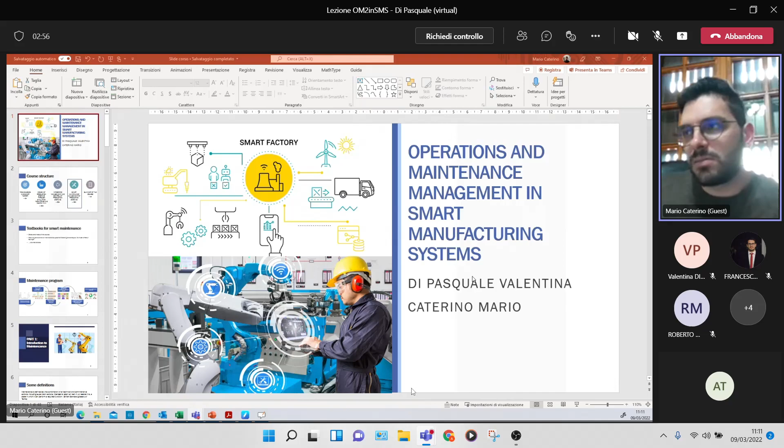Perfect. So, as Valentina said, I am Mario Caterino, a mechanical engineer, originally from the University of Campania Luigi Vanvitelli. I am here to introduce the course that will be led by Valentina and me in operations and maintenance management in smart manufacturing systems. Sorry, let me share the screen in full. Can you see the full screen now? Yes. Perfect. So, as Professor Di Pasquale said, I will lead the part related to smart maintenance management

of production systems. So, we will focus only on maintenance, and in particular on the latest maintenance topics achieved in recent years, because Industry 4.0 technologies are changing the world, and maintenance, an important part of all industrial plants, is still adapting to these new technologies and concepts. So we will start from the base of maintenance, introducing some definitions, some reliability theory, and then we will arrive at the latest innovative maintenance systems developed in industrial plants.

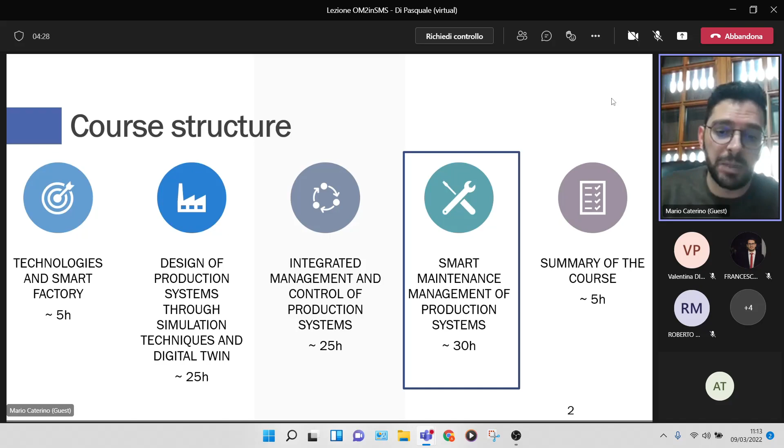Now, I think Professor Di Pasquale already told you that this is a first-year course. So we don't have very specific books that I can give you. I suggest you carefully follow the lectures and take notes on the slides and on what I will say. I can suggest this book, from which I will take some parts, and every time I take references from a journal, I will put them into the slides so you can directly have the references.

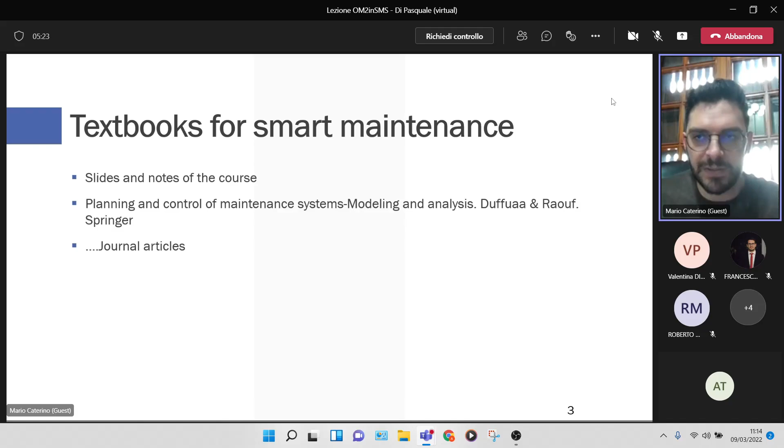Now, the program of the course is the following. Today we will recall some fundamental maintenance concepts, hopefully today and maybe also next week. We will give some definitions about maintenance. Then we will introduce three fault analysis techniques, such as the FMEA, failure modes and effects analysis, useful to provide qualitative information about the failure modes of machines, and the FMECA, which also considers a criticality analysis and gives quantitative information about failure modes. We will also see the fault tree analysis, another technique for failure analysis.

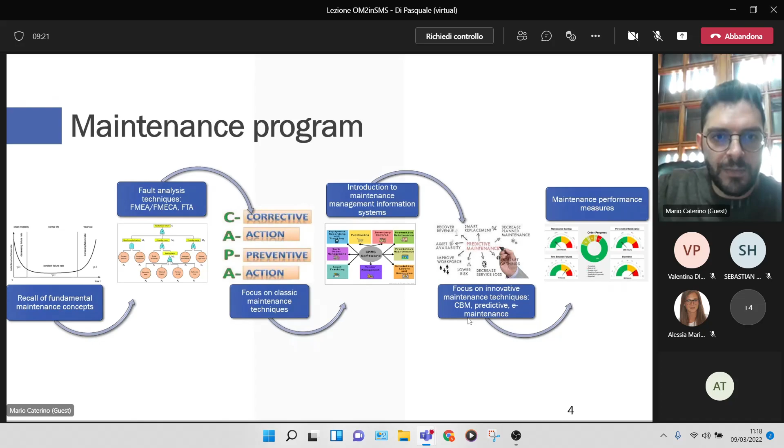In the last part we will also see some maintenance performance measures, and we will have some exercises during the whole course. Sometimes I will use my brand new electronic board, also today. I would like you to participate in these lectures. We are very few people, so sometimes I will ask you some questions, very simple ones, so don't worry. As I was saying, we will have exercises during the whole course, which is 30 hours for my part. So we can start

introducing maintenance. According to the definition given by the British Standard Glossary of Terms, it can be defined as the combination of all technical and administrative actions, including supervision actions, intended to retain an item in, or restore it to, a state in which it can perform a required function. Note that each equipment, each machine, each item is designed to work under specified working conditions related to, for example, humidity, temperatures, loads, and so on.

So when we say that an equipment or a system has to fulfill its required function, we mean that it has to work in its standard condition of temperature, humidity, or loads that are given by the designers, by the companies who designed the system.

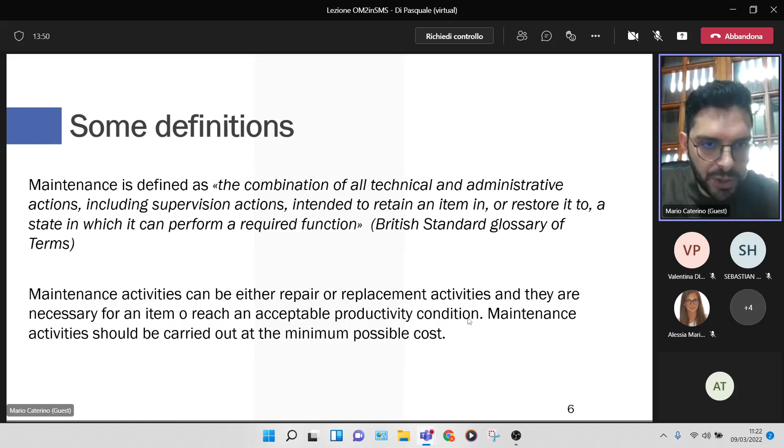And here we can introduce now the concept of fault, that represents the passage of an item from a state in which it is able to correctly perform its function to a state of damage or failure, in which the item is no longer able to correctly perform its function. It is not an on-off system, but there are also intermediate levels for each machine.

Which are the most common fault causes? We will refer in the future to fault and failures as synonyms. So if I say failure or damage or fault, you will understand that they are synonyms for me. The most common fault causes are, for example, stresses, impacts, fatigue. In fact, depending on the loading condition and material response, the structural characteristics of the components play a very important role. So, for example, a damage can occur if a component is subject to fatigue. I think you all should know what fatigue is.

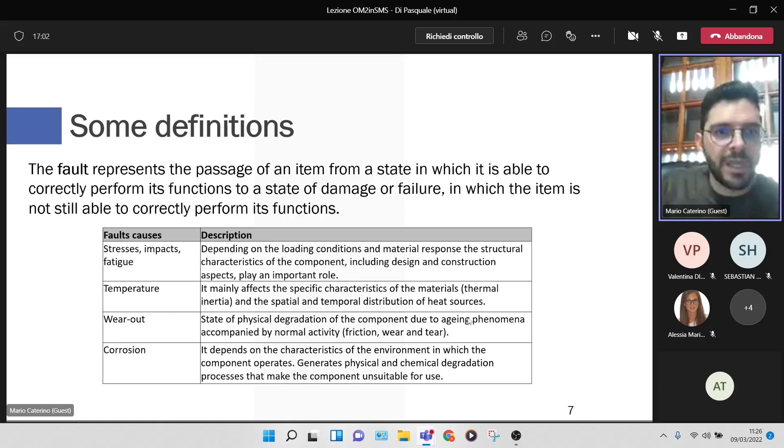Another important feature related to maintenance is the maintainability of a system or an item, which is defined as the measure of the ability of an item to be retained in or restored to a specific condition when maintenance is performed by personnel having specified skill levels and using prescribed procedures. So maintainability obviously depends on the product design, the technical level of the repair personnel, the repair process, the procedures, and so on.

So it is a characteristic not only depending on the component, on the system, but also on the skills of the personnel and on the procedures developed by the maintenance personnel. It is a very important factor because it allows us to understand how difficult it can be to maintain an item, to maintain a system.

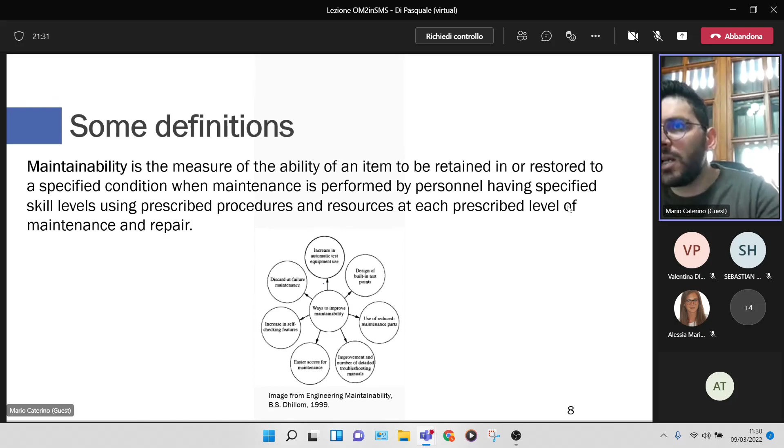Okay, now we can define different levels of maintenance, because as you can imagine, not all the maintenance operations lead to a similar status of the equipment after maintenance. We talk about perfect repair or perfect maintenance when a maintenance action restores the system's operating condition to as good as new.

What does this mean? Upon perfect maintenance, a system has the same lifetime distribution and failure rate function, we will define the failure rate function later, as a brand new system. For example, the complete overhaul of an engine with a broken connecting rod is an example of a perfect repair. Generally, when we replace an item or an equipment, we are performing a perfect maintenance, a perfect repair.

As opposed to the perfect repair, to perfect maintenance, there is the minimal repair or minimal maintenance. That is a maintenance action which restores the system to the failure rate it had when it failed. So in this case, the system is referred to as bad as old.

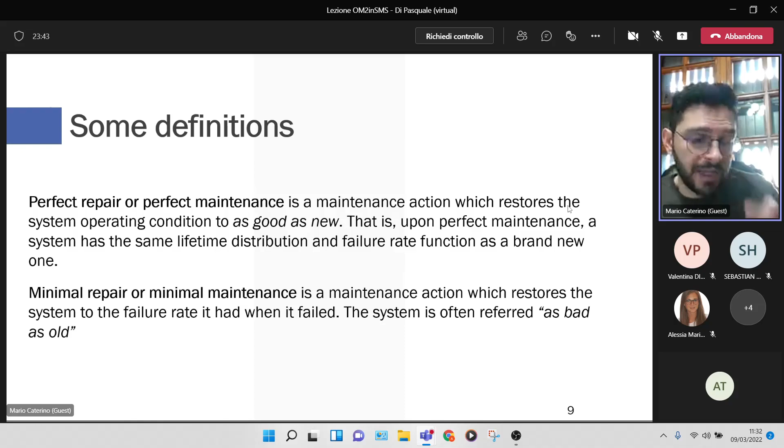For example, if you change the flat tires on your car, the failure rate of the car remains the same, because you are simply acting on a single part of the entire equipment, of the entire system that is the car. So its failure rate, the failure rate of the car, is unchanged.

We talk about imperfect repair or imperfect maintenance when we talk of a maintenance action that does not make a system as good as new, but younger. So we are in this case in an intermediate state between the perfect maintenance and the minimal repair, because I cannot achieve a perfect maintenance, but the system is better than after a minimal repair action.

In fact, imperfect repair restores the system operating status somewhere between as good as new and as bad as old. So clearly imperfect maintenance includes these two extreme cases, minimal and perfect repair. For example, engine tune-up is an example of imperfect maintenance because it restores the engine not in a state as good as new, but improves its performance with respect to before the maintenance actions.

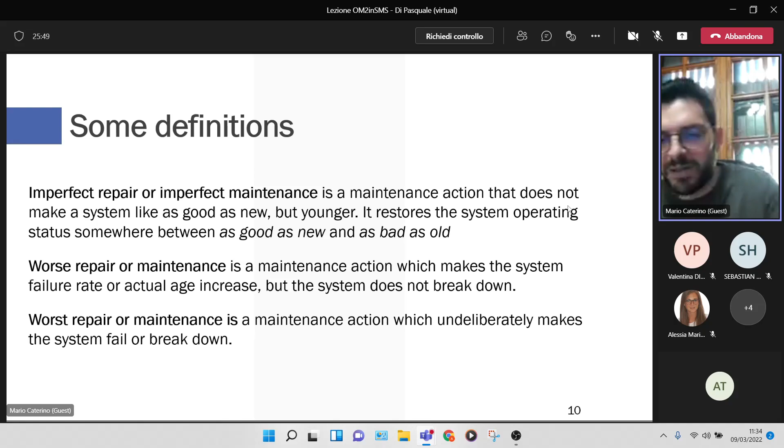What are the main causes of worse and worst repair? For example, repair of the wrong part. This is a common problem, for example, when a corrective maintenance policy is applied. In a few slides we will see what corrective maintenance is, but you can already understand that a corrective policy is when the company waits until the failure of the system or the equipment to replace the equipment.

The problem is that if you have some complex systems, you should identify the failed part. And in complex systems, you can arrive to have thousands of parts. So it is not very uncommon that in some cases a repairman, the personnel, can be wrong in deciding which is the part to repair. And in that case, if the personnel is wrong on that, they are performing a worse repair, worse maintenance.

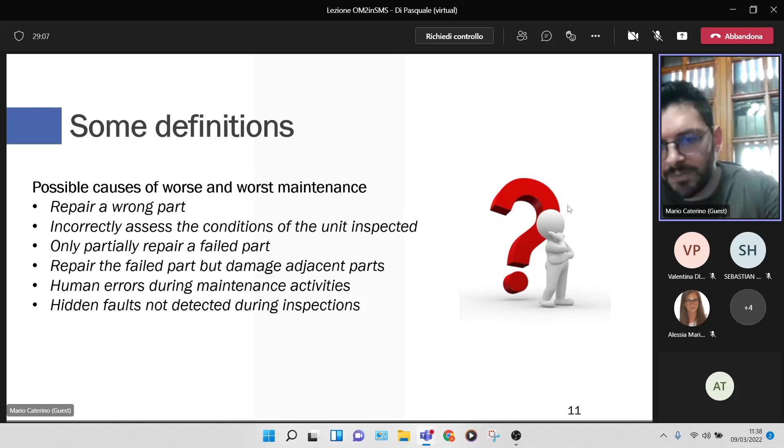Now, we talked about some definitions of maintenance, starting from its meaning, looking at maintainability, perfect maintenance, imperfect maintenance, but we still have not talked about which are the maintenance objectives, the maintenance goals. Obviously, performing correct maintenance activities leads to reducing the costs and increasing the revenues of a company. So the first reason to perform maintenance activities is for breakdown reduction.

What does breakdown reduction mean? Breakdown reduction means to reduce the time in which, for example, a machine is not working. This leads to maximizing production because, as you know, or as you should know, the overall equipment effectiveness of an industrial plant or also of a machine takes into account the availability of the machines. And obviously the availability of the machines is defined as the ratio between the time in which the machine is working and the total time available for production.

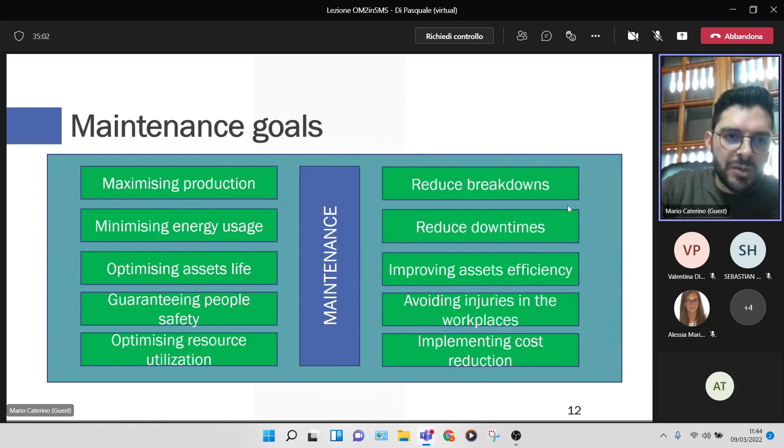Or for those of you who are mechanical, think about a foundry. If correct maintenance actions related to the furnace are not performed, the whole foundry environment can become very dangerous. So these are the main objectives for which maintenance actions are generally performed.

Now we can go towards the definition of the principal maintenance policies. But before that, we should define two types of maintenance, because each maintenance policy, each maintenance action can be categorized as ordinary or extraordinary maintenance. Ordinary maintenance concerns all the operations that must be done to guarantee the correct functions of an asset, and it is categorized as an exercise cost.

So when I perform an ordinary maintenance action, I have to pay for that action. It is an exercise cost for the industrial plant. In fact, the costs related to ordinary maintenance are expensed immediately and they are not capitalized. For example, substituting the flat tires of your car is an ordinary maintenance action.

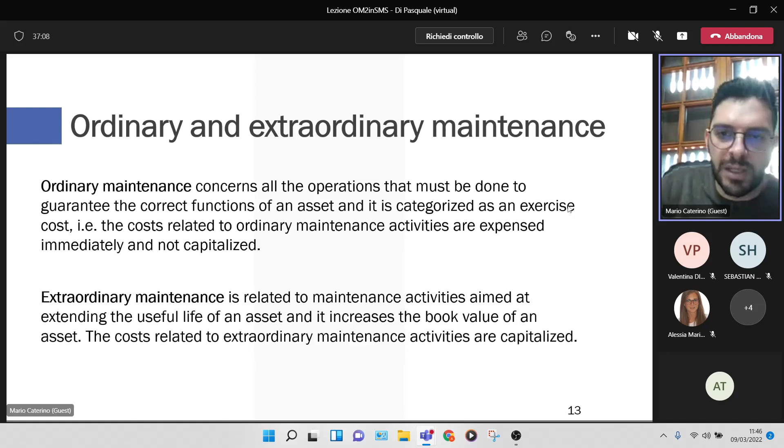Extraordinary maintenance actions instead are related to maintenance activities aimed at extending the useful life of an asset, so aimed at increasing the book value of an asset. And this type of maintenance activity has to be capitalized because it increases the value of the entire system. So each maintenance action can be classified within these two types of maintenance, ordinary or extraordinary maintenance.

As I said before, corrective maintenance is performed. It is also called failure-based maintenance, and it is performed when a system fails, when an equipment fails, when an item fails. So, according to these policies, companies wait for the failure, the damage of a system.

Note that corrective maintenance actions can be performed even if the system is still working. When I say something about damage, I mean something that can reduce, for example, the productivity of a system, reducing its potential. For example, it is not working at 100% potential, but it is working at 70% potential, as I said in the beginning of this lesson.

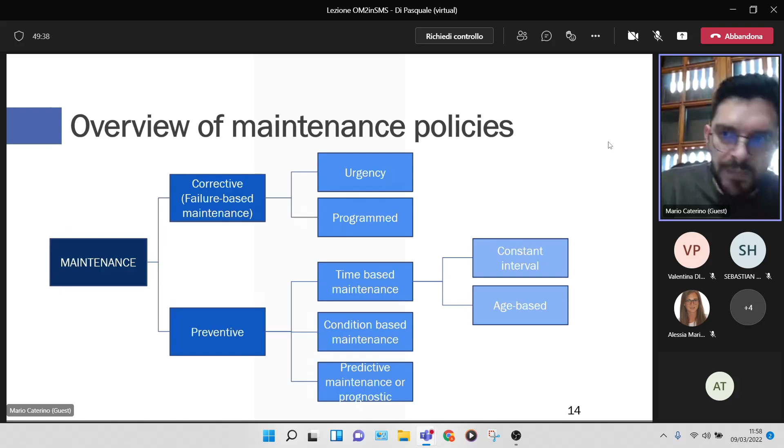Okay. Now, we should also define some important parameters related to maintenance. Let me do this slide, and then we can have a break of 10 minutes.

Okay, we need to define, first of all, the mean time between failures. What is the mean time between failures? As the name says, it represents the mean time between two consecutive failures on the same system or component, assuming that the system or component is repairable.

Be careful in the difference between the mean time between failures and the mean time to failure, because obviously mean time between failures is referred to repairable systems. The mean time to failure is referred to non-repairable systems. In fact, it represents the mean time of a non-repairable system to arrive to failure and to be replaced.

The mean time between failures, as you can understand, refers to something that has failed, but the policy, as we said, in which we wait until something fails is the corrective policy. So when we talk instead about, for example, a preventive maintenance policy, we should talk about mean time between maintenance. That represents the mean time between two consecutive maintenances on the same system or components.

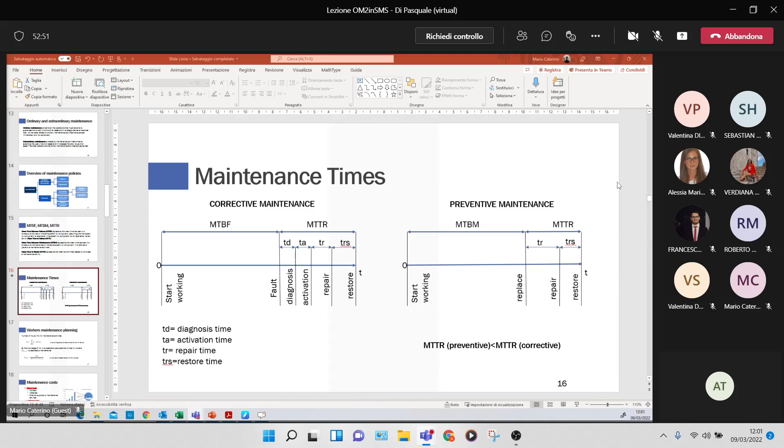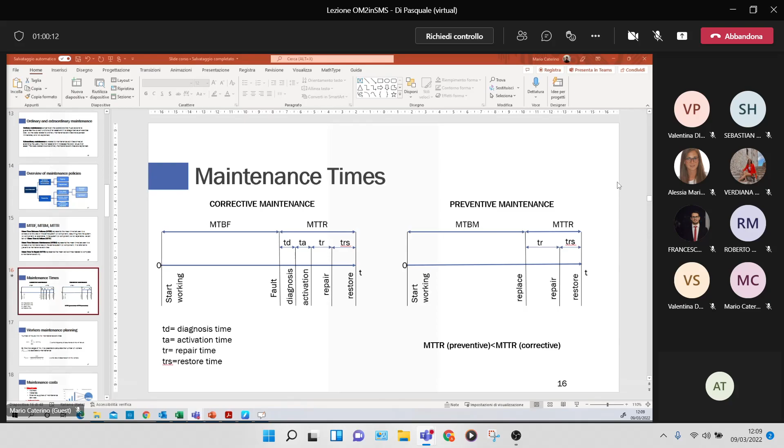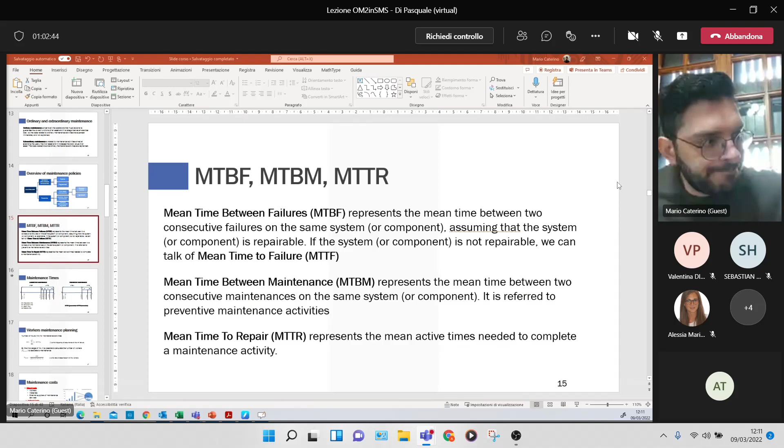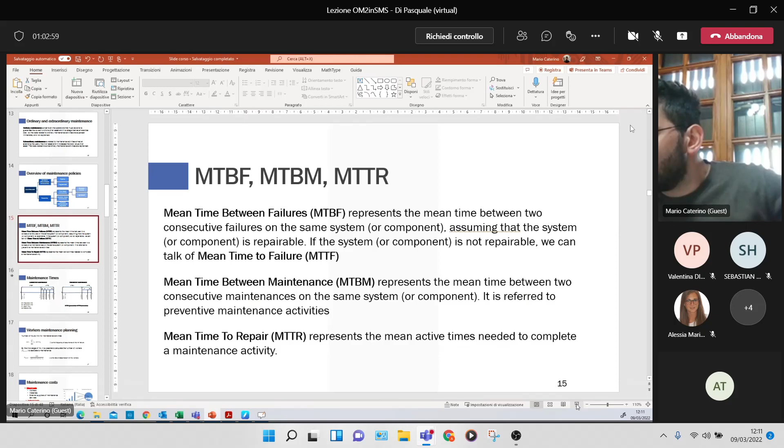Okay, before starting this new slide, I think we can have a 10 minutes break if you agree. Guys, is it okay? Yes, thank you. Yes, it is okay. See you in 10 minutes. Okay. Okay, guys, are you there? Can we restart? Yes. Perfect. Okay. I never ended sharing my screen. Okay. Can you see the full screen now? Yes. Perfect.

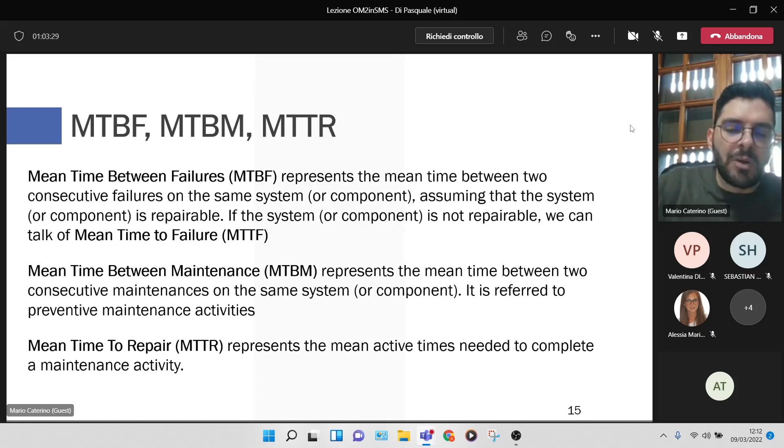Okay. So we were talking about the definition of some important parameters for maintenance, in particular the mean time between failures, the mean time between maintenances, the mean time to failure, and the mean time to repair. Now, according to these definitions, we can try to evaluate how the mean time to repair is composed, referring to a corrective maintenance policy and to a preventive maintenance policy.

So let's suppose, for example, that we have a component that starts to work at time 0, and it works for a time equal to the mean time between failures, the MTBF. When the failure occurs, a maintenance action has to be performed, and it requires the mean time to repair. Now we can say that when we are performing a corrective action, the mean time to repair is the sum of 4 values: the diagnosis time, the activation time, the repair time, and the restore time.

What are they? The diagnosis time is simply the time needed by the personnel to identify the part of the system that has failed. Often, as we were saying, we have very complex systems made of hundreds of parts. So it is not simple to evaluate which component has failed. This requires a diagnosis time, that is the time in which we are waiting for the diagnosis made by the skilled personnel that perform maintenance activities.

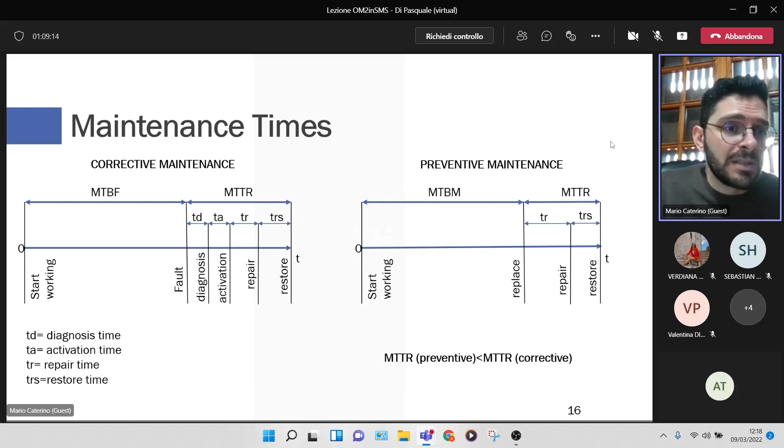Perfect, perfect. And yes, I think also the activation time. Why? Because if I know beforehand that I have to repair something, I prepare what I need to do it. Perfect, you are right. So in fact, if we look at what happens when we are performing preventive maintenance, you can see, as your colleagues said, that the diagnosis time and the activation time disappear.

The diagnosis time, because when we perform preventive maintenance, no components have failed. So there is no failure. I do not have to estimate which component has failed, obviously. But also the activation time disappears, because if I am going to perform a preventive action, I already know on which components I should act. And so I am already prepared for it. So also the activation time disappears. Good.

What can we conclude? Supposing that the repair time and the restore time are the same in the case of corrective maintenance and preventive maintenance, so for example, in preventive maintenance we suppose that repair or replacement times are the same as corrective maintenance, we can say that the mean time to repair for preventive maintenance is always less than the mean time to repair for corrective maintenance. Perfect.

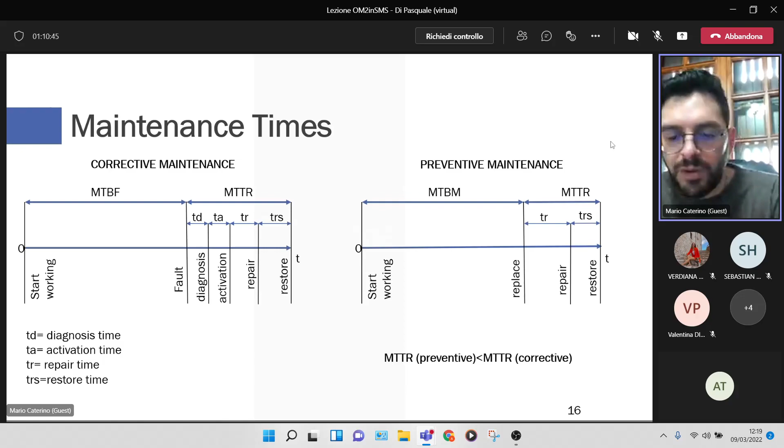Now, we can also estimate the number of hours to perform maintenance activities. To do this, we should know some very important parameters that are not very simple to obtain, because the number of hours for maintenance activities can be seen as the sum of the frequency of occurrence of the i-th failure, referred to the i-th component, multiplied by the mean time to repair for the i-th component. Why is it important to know the number of hours to dedicate to maintenance activities?

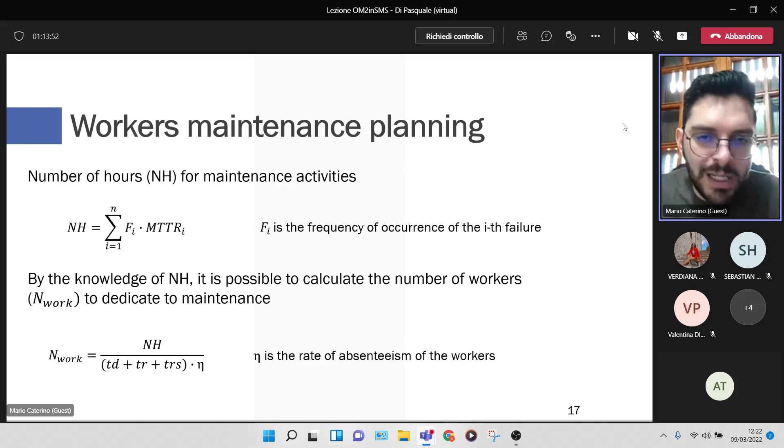This would be very beautiful if we were able to know accurate information about f_i, the frequency of occurrence of the i-th failure, but obviously it is not fixed, and it is not very simple to evaluate. Like also the MTBF, the mean time between failures, or the mean time to failure. They are statistical values evaluated with a certain probability. They are not fixed values. It would be very beautiful, but it is not. So, by means of these equations, you can calculate the number of workers to dedicate to maintenance.

Why is it important to calculate the number of workers for maintenance activities? Because the general evaluation of costs related to maintenance is a very important issue for companies, because in some cases maintenance activities can represent even 60% of the total costs of a company. It is a very rare case, but on average we are at around 15-20% of the total company costs.

Maintenance costs, like all types of costs, can be divided into two main categories: direct costs and indirect costs. Which are the direct costs? For example, the cost of workers, the ones we defined before, the cost of materials, because when you need to replace something, you pay for the new component, but also when you repair something, you might use materials, and eventual external suppliers for maintenance services. Indirect costs instead refer to lack of production, product quality, reputational damage, or safety conditions for workers.

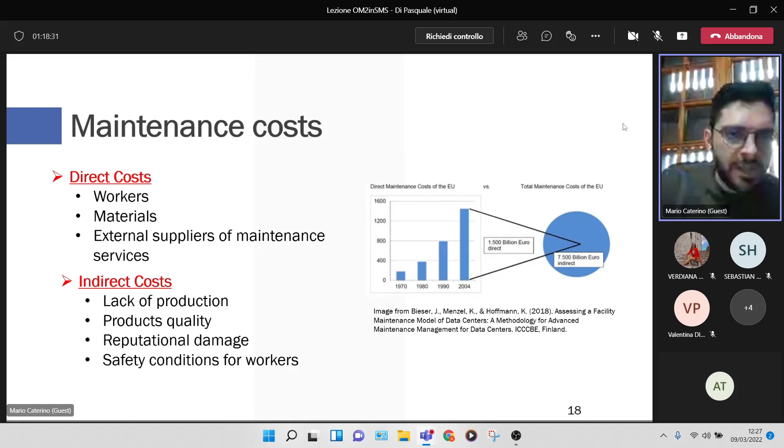And the costs of maintenance policies change according to the frequency of failure of an item. As you can see, there is an optimal maintenance cost according to the frequency of failure for components. In fact, preventive maintenance costs increase for components with low reliability, because in order to avoid failures, companies need to perform more frequent inspections. And this also depends generally on the fact that low reliability elements are used when the indirect costs due to failures are not very high. So, for example, when you have a component with low reliability, it is a very cheap component, and in that case, it is not useful to perform a lot of inspections or preventive maintenance.

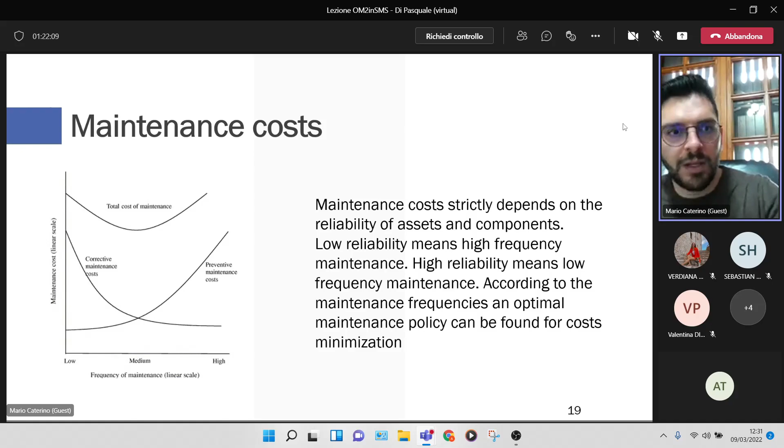Now, what can we do to decrease maintenance costs? Because that's the main issue of many companies when dealing with maintenance problems. For sure, the first thing should be to increase maintenance efficiency, intended as the execution capability that can lead to optimal conditions for reducing direct costs. How can I reduce the direct costs? For example, by training maintenance workers to reach an adequate formation. This can help to reduce the repair time or the diagnosis time. So the training of maintenance personnel can help to reduce the MTTR, which obviously represents a cost for a company.

We can reduce the direct costs by appropriately managing maintenance jobs, by providing maintenance materials and tools in the right place at the right time, and by respecting the maintenance procedures. All these aspects can help in reducing the direct costs of maintenance, the ones related to workers, materials, or external suppliers. To reduce the indirect costs of maintenance, I should have prediction capability. In fact, predictive maintenance is the best policy to reduce indirect costs, because it allows to correctly predict maintenance needs and plan maintenance activities according to the production needs.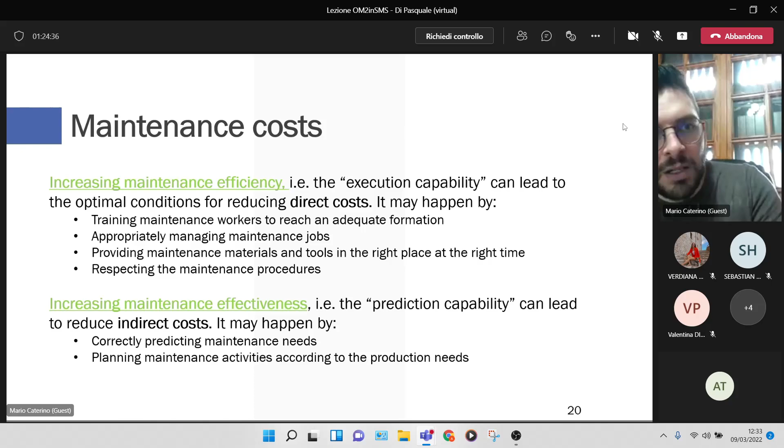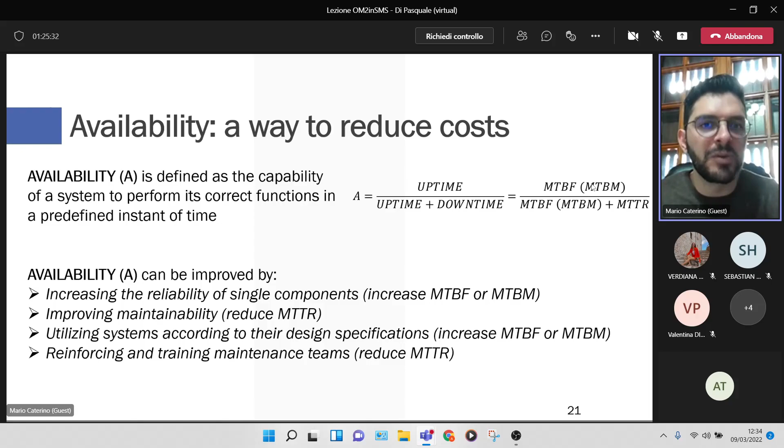Another way to reduce costs is to work on the machine availability, the system availability, or component or item availability. As we defined previously, the availability of a system or a machine can be defined as the total working time, here called uptime, over the total available time, which is the sum of the uptime and the downtime. As you can see here, you can define the uptime as the mean time between failures, because the time between failures is a time in which the machine is working.